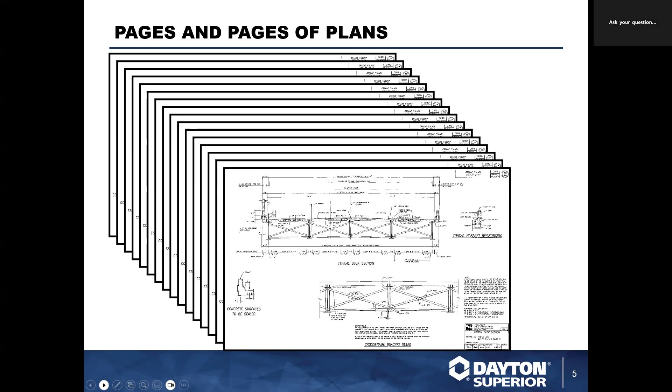We're only talking about 2 or 3 pages of the plan section that we are looking for. But you're going to go over those, right? And we are going to talk about those. Now, as I said, only 2 or 3 sheets, typically, from the whole set. Typically, they're going to be located in the structural component of the bridge set of plans. So those would be the S drawings.

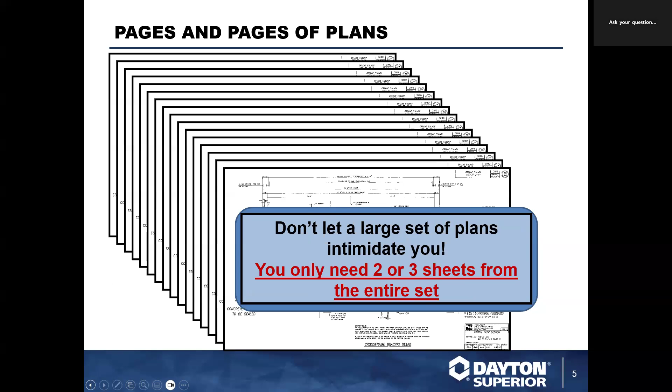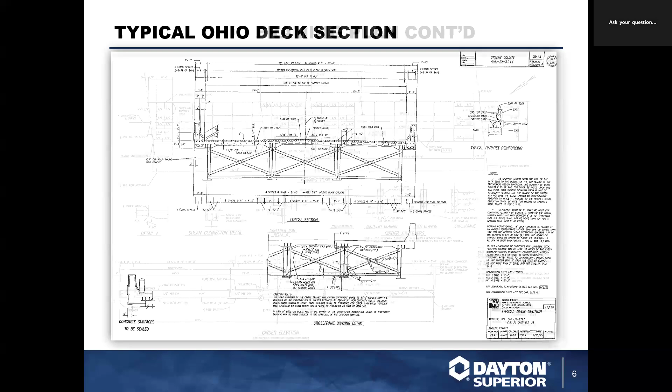So one of them is going to be obviously the bridge deck section. So here's a typical Ohio bridge deck section. As you can see, this is a transverse view going right straight through the center of the structure from abutment to abutment. And you've got basically details here that you are going to be looking for on this page. This page actually includes the majority of the information that you are going to need, such as everything from out to out. And we're going to show you where to find the deck thickness and other things on it here coming up.

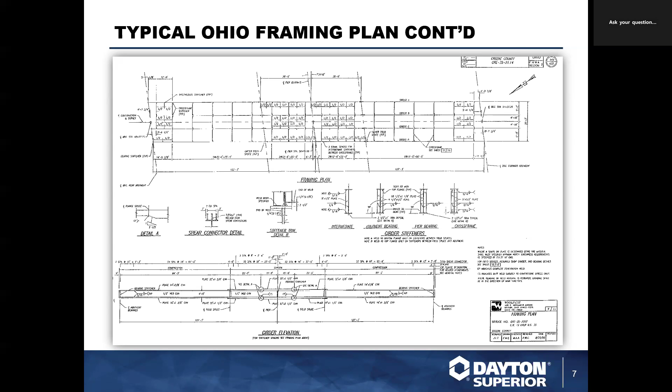The other page you are going to need to start with, and I like to start with this because this is typically the first one I have, I like to know how big the project is going to be. So I'm looking for the typical framing plan. This one here is a steel structure. Concrete structures will look pretty similar, only they'll have obviously concrete girders in lieu of steel girders. So here we have a typical Ohio framing plan.

You're going to get the overall length of the bridge, typically from out to out. Couple of different places you can get this. You can get this from the drawing up above, or you can get it right off the girders down below, because obviously you've got to have a girder going from abutment to abutment. And usually that's how long the bridge is, usually within an overhang bracket or two at most.

The other thing you're going to find on this detail is what type of girder it is. The girder will be denoted as either a W or WF number, or it'll actually give you the true measurements of the beam flange, web, and bottom flange. And it'll also include any tension zones, etc.

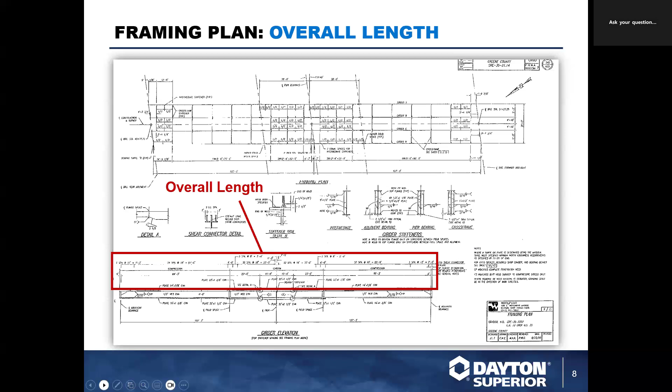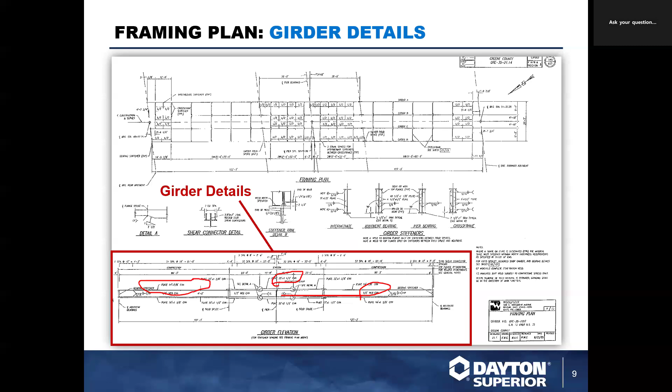So here we have our girder details. This section here, as you can see, you've got your top flange dimensions right here. You've got your web dimensions right in here. You've got other plate dimensions here for the top of the girder. So as you can see, the flanges change from section to section within the beam structure. And this will all be denoted on the girder details.

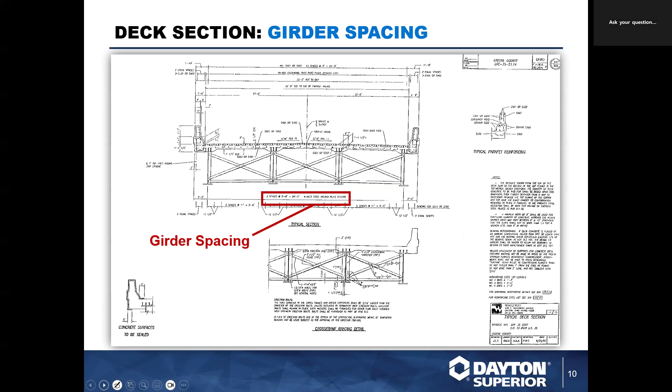So now we're going back to that deck section view. Now that we've got the top flange dimensions, we know what size our top flange is. Let's figure out what we've got to have to go with it. To calculate out a bridge deck calculation sheet, you're going to need the girder spacing. What's the spacing on the girders? This is typically located on this view. It's usually anywhere from 6 foot to 10 foot in width per section.

You're going to have your deck thickness located here, so you know how thick the deck is. You're also going to have the deck thickness over the girder. So that's going to tell you how much of a haunch you have. And haunch is the elevation from the top of the beam flange to the bottom side of the deck. Haunch is especially important when you're calculating interior bays.

If you're using SIP decking and or concrete plank decking, the concrete plank and the SIP decking take that haunch number out of the equation. They actually calculate that into the position of the SIP. And SIP stands for stay in place.

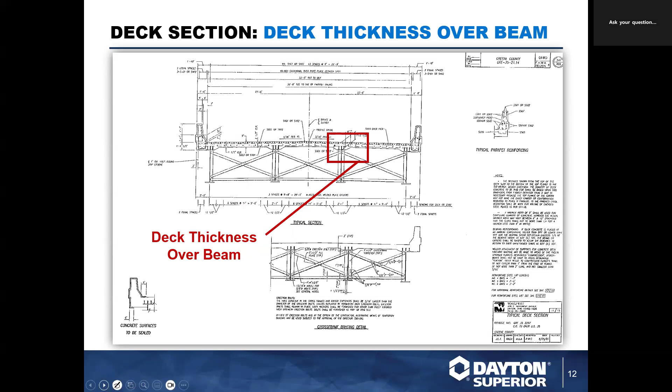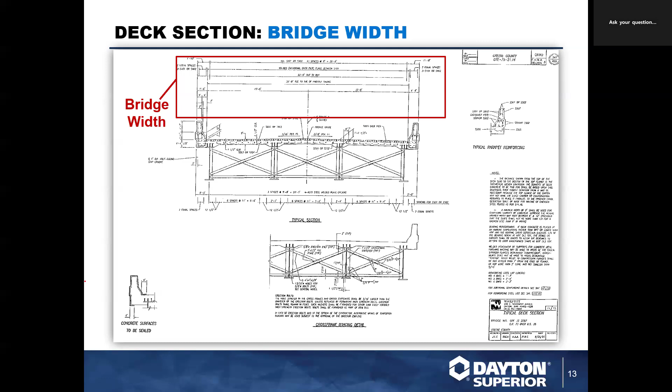And then we have our bridge width. This is going to tell you how wide your finishing machine has to be. Why is that important? Because that's going to tell you how much your machine is going to weigh. Typically, a finishing machine comes in a standard width. If it goes a little bit wider, you add a section to the machine to cover that width, which increases the overall weight of the machine.

So here we're going to be talking about overhang brackets and the hangers that accompany them, using all that information we just compiled. We're going to be looking at beam details and geometry, wheel load spacing and how that plays a role in the spacing of the overhang brackets, the contractor's preferred hanger type and spacing, and what lumber the contractor is going to prefer to use.

Here we go. I lost the page.

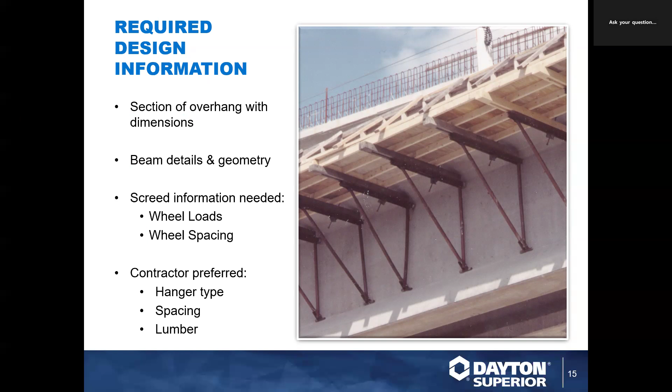Okay. So here we've got different types of hangers that we've got. And each one of these has a different cadence, per se, let's say, in how it's going to be used and what it's going to be used for. For interior forming, you've got the hanger in the top right-hand corner.

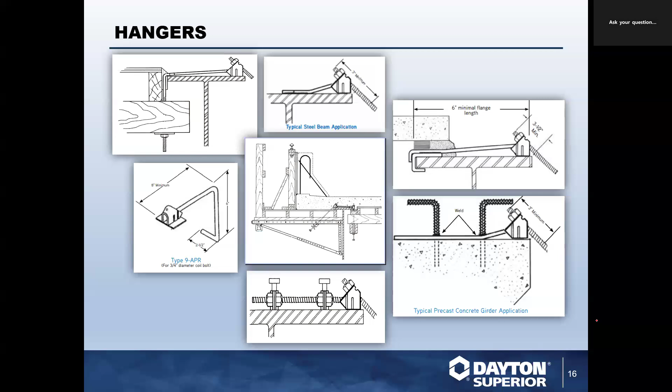For half hangers with SIP decking, where they will allow welding to the girder, you have half hangers that can be welded to it. We've got a variety of wraparound hangers, other types of weld-on hangers, and also a precast hanger that you're seeing here that we're showing, a type 9 APR hanger. Those are typically designed as a precast hanger.

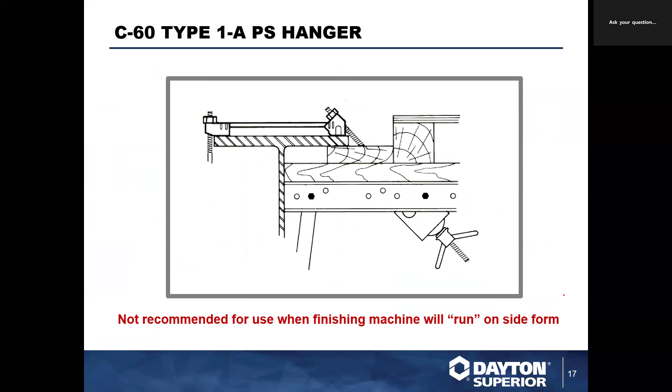So here's our interior design. One of the more common ones here that we see is a type 1A PS hanger. Typically, this is one where the finishing machine will not be on the overhang bracket, but will be on the girder. So this is a very commonplace hanger to be used in the marketplace.

Now, because we're dealing with exterior, we're going to look at exterior here, being that everything else on the interior either was covered last week, or it's going to be covered here with SIP decking. Steel decking typically is basically a corrugated metal decking that you'll have a subcontractor come in, place in the deck, and take care of all the center bay forming.

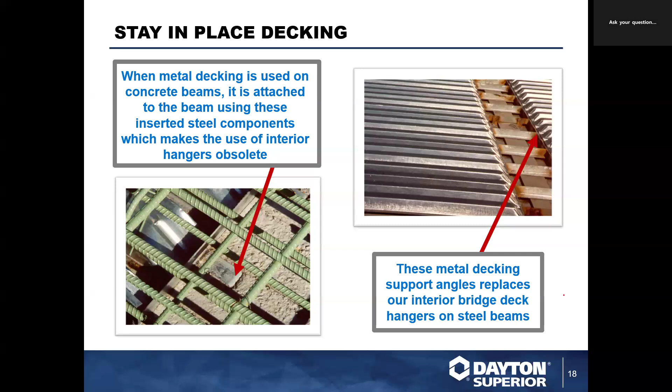Unfortunately for the distributors out there, it takes away a big sale for us, but for the contractors, it's actually much cheaper square footage wise to use SIP decking, just because of labor costs. And whether you're using steel beams or concrete girders, there's different attachments and components that can be done with this. And you're going to see sections that look something very similar to this.

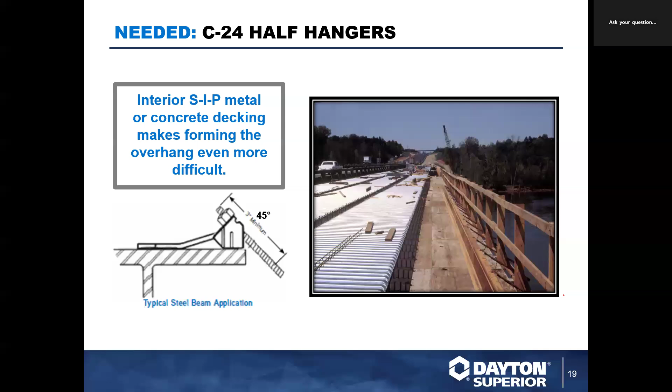This is a structure up in upstate New York, where they actually use a half hanger to weld to the girder in places. You can see it down on the side here, the SIP decking off to the side here, and their overhang brackets formed up with guardrail and so forth.

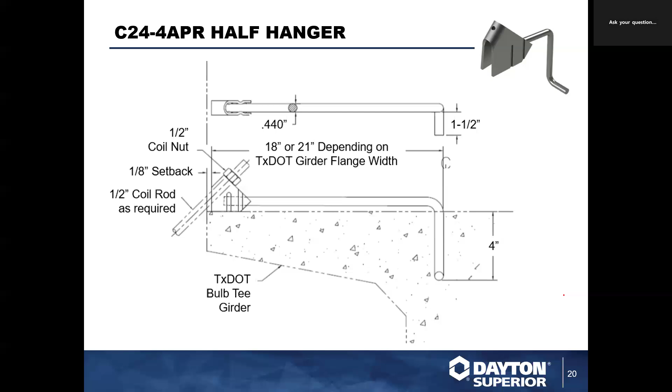But these precast hangers can be adapted. The standard is a 6x4x2. Here we've got one that is either 18 or 21 inches by 4 inches by 1-1/2 inches. So we can adapt them so we can go back to get to an anchorage point where we're into the meat of the girder.

So why is that important? Well, the other option that people are using is concrete plank. This is a new fashion of SIP decking. We are seeing concrete plank being used in more and more states, primarily because the material is porous. So certain states like Texas, Colorado, Utah, and we're seeing more and more of them in Missouri, Kansas, et cetera,

are all going to this in lieu of SIP decking, because SIP has been given the bad rap that if it rains or anything, any of the sodium or calcium that is on top of the bridge deck will seep through the deck, hit the SIP decking, and then collect there. And what it will actually do is disintegrate or diminish the strength of the concrete deck, causing you to have to do deck repairs more often.

So they've gone to this concrete plank, which actually is the same thing as a concrete pour. Concrete is a porous product. So by going with a concrete plank, the material allows the moisture to seep through the bridge deck, then through the concrete plank and out through the bottom of it, which enables the state agencies to visually inspect easier and better what the condition of the bottom half of the deck actually is.

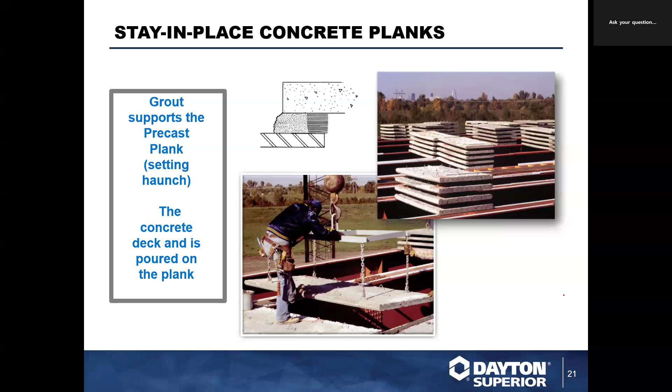The dimensions here are typically the center to center, basically the clear span plus about 4 or 5 inches, so they can cover and sit on the girders themselves and sit in that pad of grout. You may also see a piece of high density foam sitting on here to stop the grout from oozing out to the inside of the girder. Different states have different specifications regarding this.

Well, if the states are using a steel girder and they're going to use a concrete plank for their SIP, we also have wraparound type hangers, which actually can be placed prior to putting the precast plank in place. And a lot of times when contractors have a job with this, and especially these are great for areas on the beams where there's tension zones where you can't weld, or if the state won't allow you to weld to a steel girder at all, this wraparound is probably one of your best options as far as strengths of the hanger.

A lot of contractors will place these hangers before the SIP contractor comes in, and then the SIP contractor will be able to notch out the SIP in and around that edge where it actually wraps around.

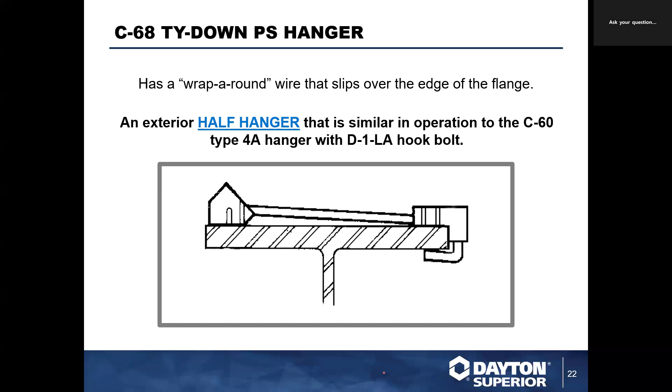The overhang bracket on all these jobs here typically is going to be a standard 45, a C49. It works with the 45-degree receptacle in the hanger to accommodate anything that you have for beam depths from typically 36 inches all the way down to 90 inches. So the C49 has an adaptability of 30 to 50 inches in vertical height. And the C49D, which is very similar, only a couple of pipes are a little bit longer, can extend those out to 50 to 70 inches.

All those brackets, including our C49S, which we're going to show a little bit of how we actually modify a standard C49, all have a 3,750 pound load rating and a 54-inch horizontal dimension for platform.

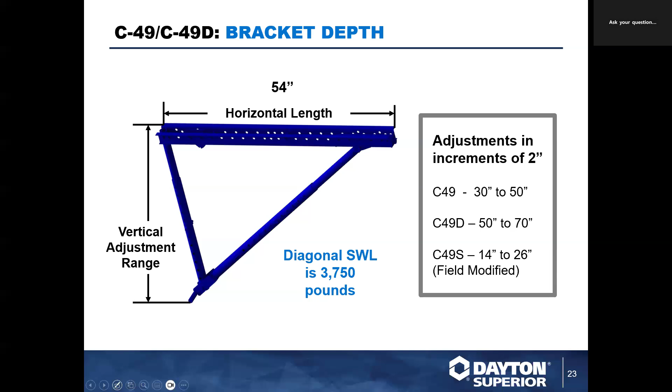So with the C49S, probably our biggest question we get: I have a job here and it's got to have a short bracket. I want to order a C49S bracket. I own C49s, but how do I get there? Well, if you own C49s, the trick is there are 2 pipes in the vertical leg. Take the interior pipe out, set it off to the side. Where it connects to the horizontal member, you want to connect that outer pipe at the same location.

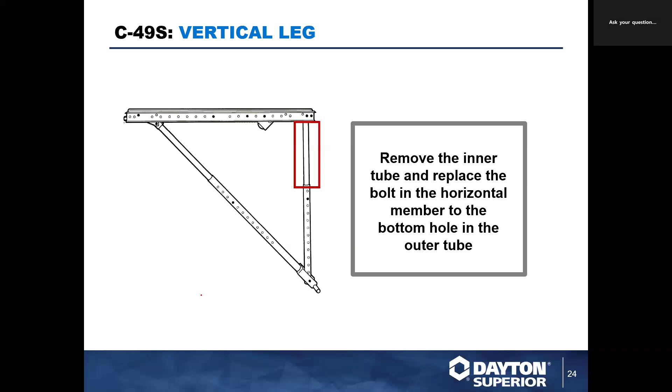So basically you're going to pop the bolt out in the center component where the 2 pipes actually join, slide that outside pipe all the way down and into between the 2 horizontal members, and then put a bolt through that, which will give you an S bracket. You now have the ability to run that bracket from 14 inches to about 26 inches in height altogether. So you can actually have 26 to 28 inches depending on where you're located.

Depending on what your girder dimension is, you may have only 14 inches or 20 inches to work with. You want to keep it up above the bottom of the beam, especially in a concrete beam. This is a type 4 or type 5 girder. You want to make sure that you stay about 3, 4 inches up just in case of any settlement once you start putting concrete and the finishing machine starts to ride on it.

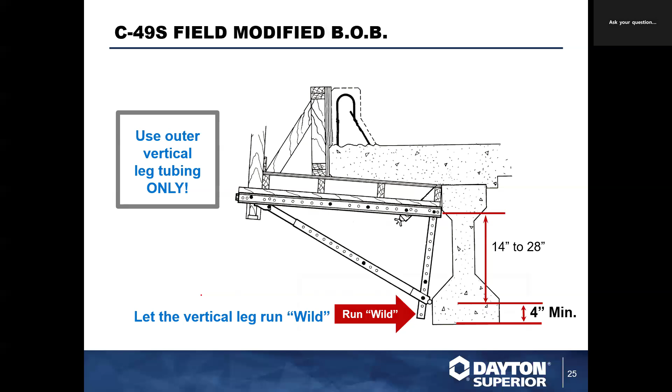So let the vertical leg run wild, kick it out here. And if you run into a steel girder with this application, you're going to want to kick it out. You can have a couple of different options here. You can just shorten up the diagonal and have your horizontal all the way back to the steel frame, or you can kick the horizontal member out along with the bottom diagonal where it connects here.

The overhang bracket policy here is you want to make sure that if the bracket is sitting out and keeping it perpendicular, you have that blocking. Myself, I like to trim the blocking so I'm about an inch short of the outside edge of that beam flange. That gives me a little notch area where my diagonal piece can sit and rest. This helps ensure that the bracket won't slide down or move around. So that's a nice little safety feature.

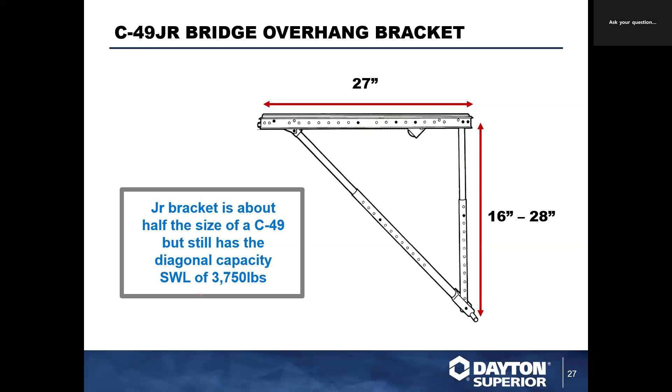We also have available a junior bracket. We had 54 inches on our horizontal; now we have 27. We now have a vertical adjustment from 16 to 28 inches. And you can make this a little bit shorter too, just like you would with a C49, by removing that interior pipe if need be.

We do have a wall plate adapter. On your precast girders, if you're doing a precast box girder or some of the next girder generations, you may need to form up your overhang, but you don't have a bracket in place. Here you can actually have an insert cast into the girder, and you can then connect to that girder with a wall plate, or you can use the overhang bracket as a scaffold bracket by using the C51 wall plate.

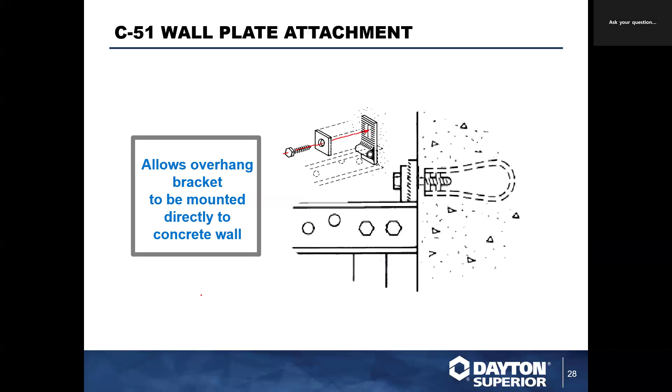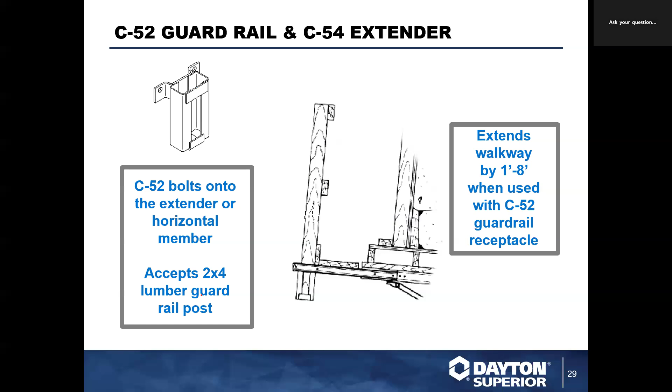It still maintains the same 3,750 load capacity of the overhang bracket. It is a much stronger and usable receptacle, especially for scaffolding and shoring. We do have guardrails available for this, guardrail receptacles, and also extenders so that you can get 20 inches of extension on the walkway. Remember, that's walkway, not concrete loading; it's for live load only.

Would I be considered a live load? You would be considered a live load. Okay, but not- And I am also a live load. Cool.

So we have a safety rail adapter kit that's available. You can get a guardrail receptacle that will bolt to your bracket with the post already attached. This enables you to have pockets for all your 2x to be placed. And then all you have to do is run a screw or a nail through it to attach everything. And this meets and conforms to OSHA requirements.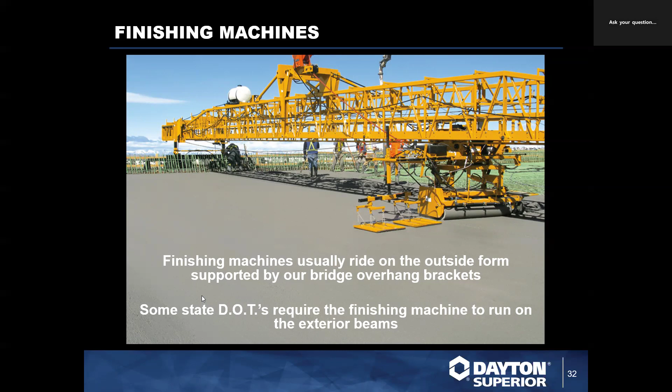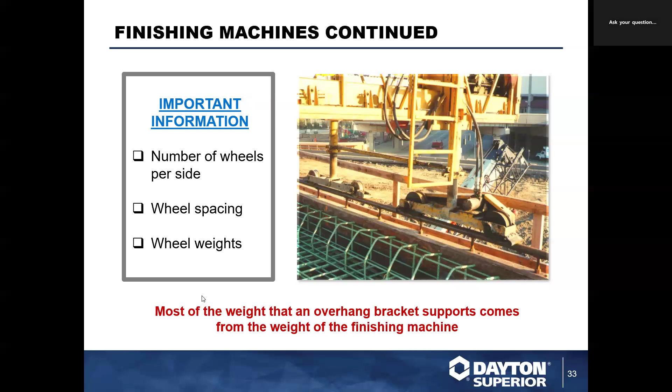Depending on how wide the bridge is, you need this information to get the number of wheels per side, the wheel spacing, and the wheel weights. The contractor GC is the only one that can give you that, because he knows his machine, whether it's a Bidwell, Gomaco, or an Allen machine. If you have dimensioned how wide your legs are going to be, you'll know how the wheel spacing is going to be. They'll be able to tell you the wheel spacing and wheel weight. And this is all required to help fill this deck information sheet out.

If you have a request for bridge overhang bracket spacing, this is available online at bridgeobeng at DaytonSuperior.com. Or you can download it off of our website, fill it out and forward it to the email address above. This way we start the process of getting the engineering, whether you're looking for just a fascia spacing, interior spacing, and or a drawing required to go with it.

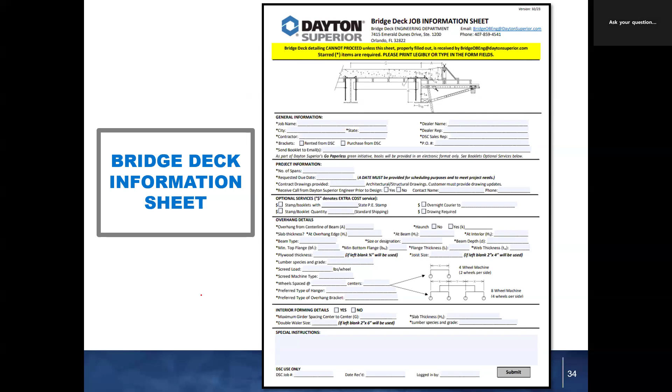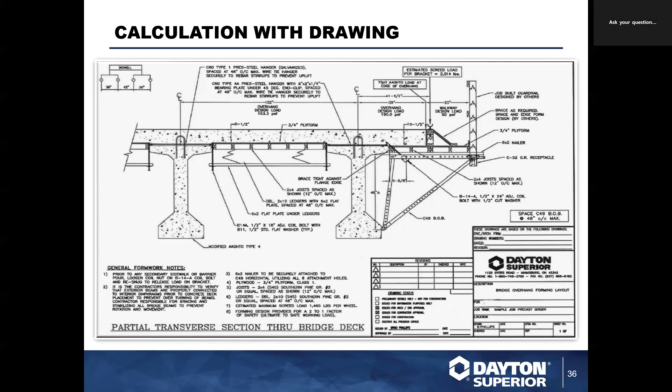And we can also provide this with a PE stamp for an additional charge.

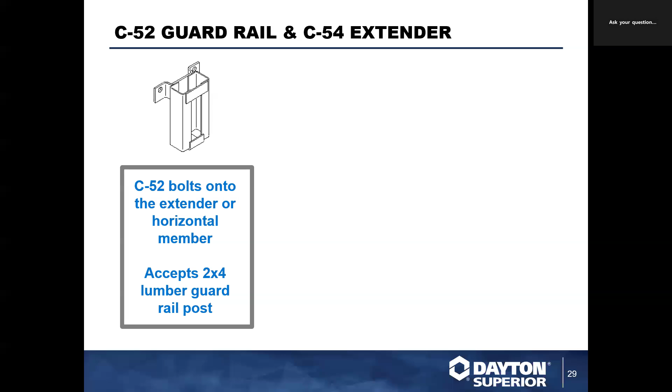Oh, I didn't make you a pen. It's just a laser pointer. Sorry. You can do it. I love dual screens. Pen.